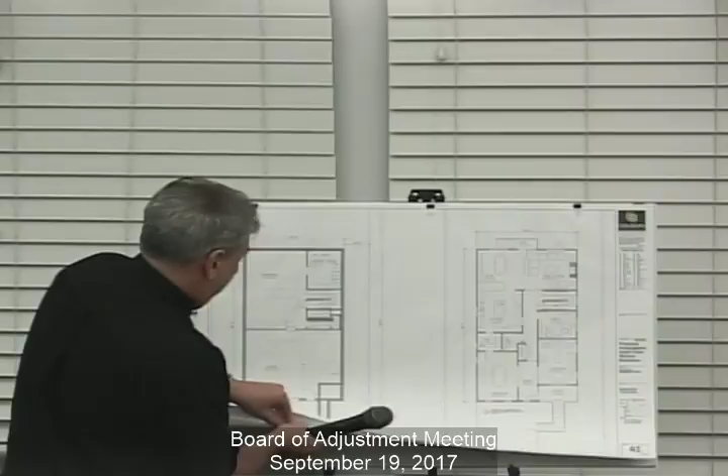Can you explain again why the man door for the garage is in the front of the house and not out on the side? Yes, so the way the grade of the property is set, we would have to cut into the side of the property to get into the side of the garage. There is a retaining wall planned on the side, because the neighboring property is higher as well, to maintain their access way and a safe distance, and provide our garage recessed. If we made a door to the side, we'd need a larger retaining wall and a larger paved area, also creating sort of a hole where someone could be hiding, which is something we don't want to create.

I know that as you get closer to the temple, the houses sit up a little bit higher, it comes up like this, and as you go further toward Route 22, it's coming down somewhat. How much of it is actually going into the ground? So the driveway itself, this is approximately the line of the grade. If you connected the line, you could see that about 4 feet or so are below.

So the driveway's gonna slope from the street down? No, no, it'll be flat, slightly up, about 6 inches, because we don't want to have water running into the garage. Exactly, that's why I was asking. So we're cutting into the grade about 4 feet below what's there currently, creating approximately a 4-foot retaining wall on one side that will start at 0 and climb to the back of the property, similarly to the property to our left as you're looking at it from the street, as there are several retaining walls on her property as well.

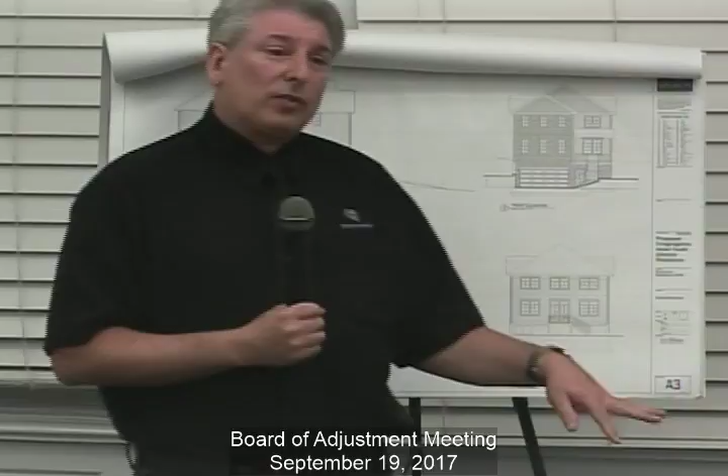I just have one other question. With the retaining walls and the driveway being set down, you're gonna have to put some guard rails or something so people don't fall down onto the driveway, correct? Well, we weren't planning a guard, only having a step. Since it's not considered a walking surface, it's lawn there, there's nothing that requires a guardrail. So if somebody falls off the 4-foot-high wall onto the driveway, I'm concerned about safety, you might want to consider putting something there to prevent children from falling. We'll have the block at the edge sticking above the ground, so someone would have to be trying to jump over it. But since there's no reason to be walking there, it's like any other retaining wall on a property.

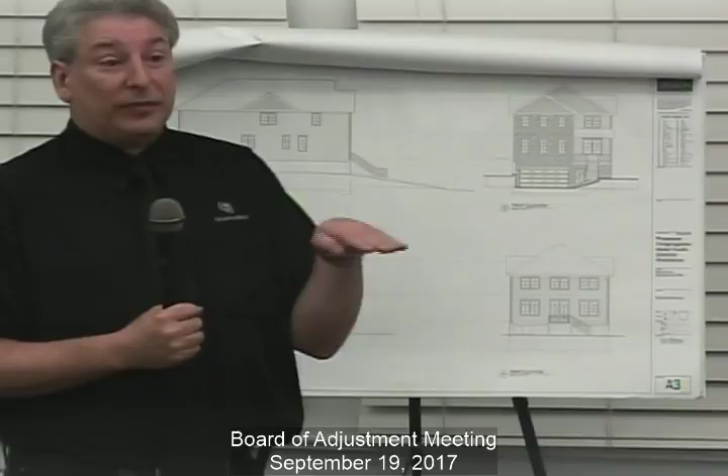If we do feel that is an issue, we could put up some sort of small guard on it. It's only 4 feet at the house point, and obviously it's pitching down to nothing toward the street.

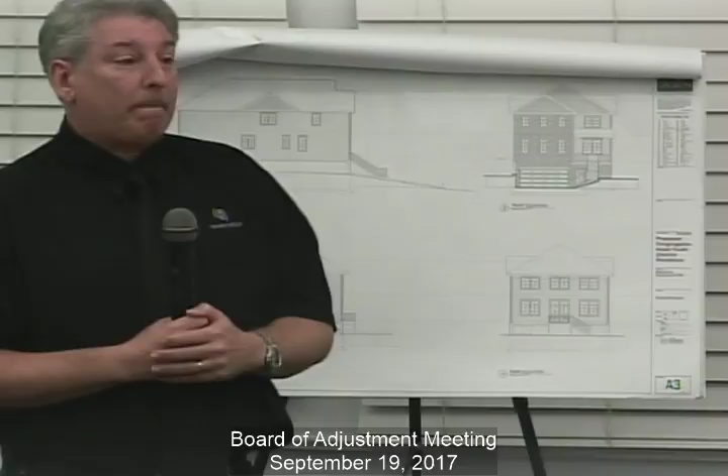Anybody else on the board have any questions? Do our professionals have any questions? Is anybody from the public who would like to ask any questions? Thank you.

At this point, I would call my final witness, Matthew Seckler of Stonefield Engineering. He's our planner.

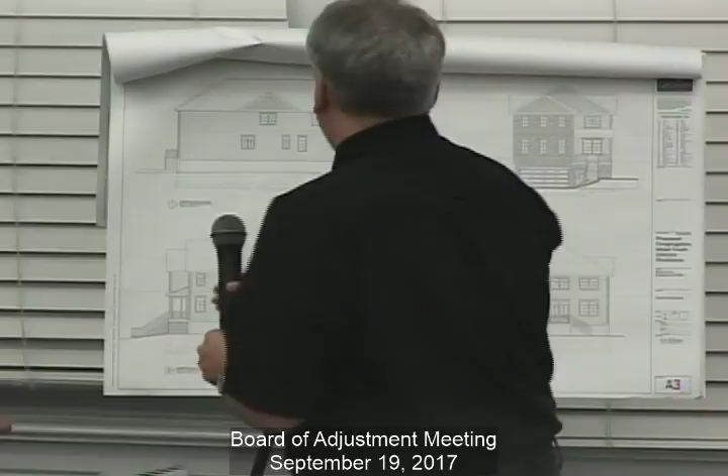You swear the testimony you're about to give and any evidence you present to the board is the truth, nothing but the truth, so help you God? I do. Please state your name for the record, spelling your last name, and give your work address. My name is Matthew Seckler, that's Seckler. I'm a senior project manager at Stonefield Engineering Design, address is 92 Park Avenue in Rutherford, New Jersey. Mr. Seckler, would you tell the board your credentials and that your license is current and in good standing? I have a Bachelor of Science in Civil Engineering from Union College, a Master's in City and Regional Planning from Rutgers University, licensed professional engineer and professional planner in the state of New Jersey. I've appeared before this board a handful of times previously. And your licenses are all current? Yes. Thank you, we'll accept you.

Okay, Mr. Seckler, is this a new exhibit? Yes, I believe it should be A3. Okay, so if you would be so kind as to take the board through the justifications for the two requested variances, building coverage and lot coverage, from the planner's perspective. Sure, I'm marking A3, titled Aerial Exhibit prepared by Stonefield Engineering Design. It was prepared September 19, 2017. It shows a Google Earth photo that was taken in April of 2016, so fairly current.

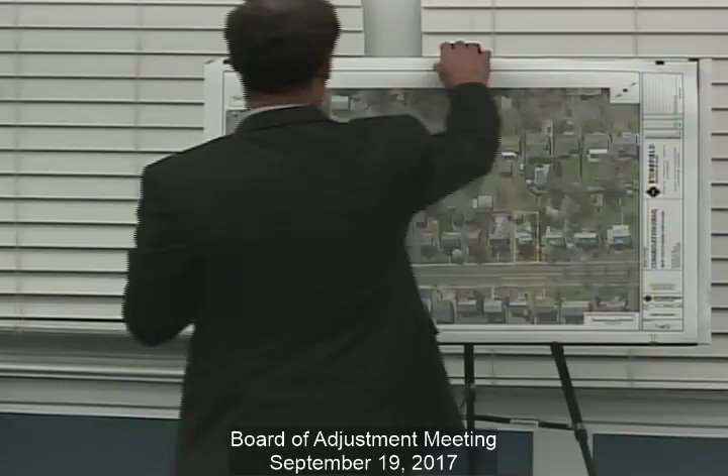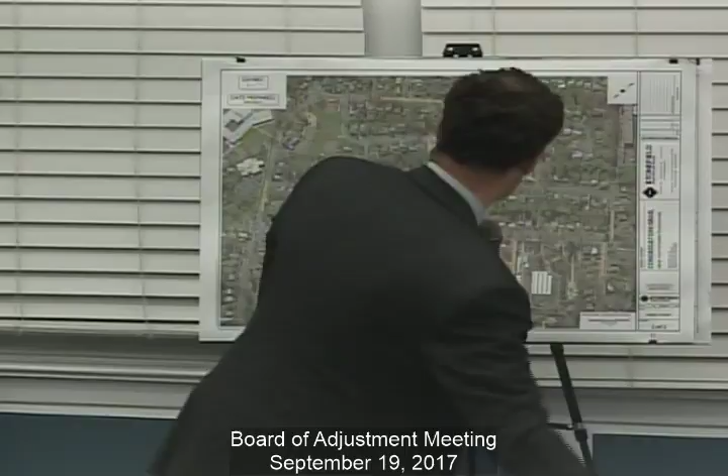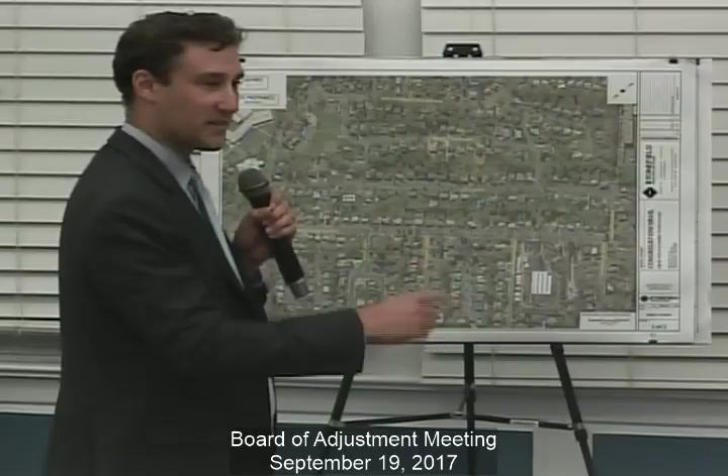What's important to note - I'm going to flip to another aerial exhibit, which I'll mark A4. This is a more zoomed out aerial exhibit prepared by Stonefield Engineering, dated September 19th, 2017. Again, the site is outlined in yellow. I've zoomed out to show the limits between Shunpike Road and Nelson Place. Every single lot to the right along Mountain Avenue, along the easterly side, is a conforming lot, at least 7,500 square feet or larger. This is important when looking at the size of the house, and I'll explain later how this house would be permitted in terms of building coverage on every single one of those lots to the south of our property. So I think it's in character with the neighborhood.

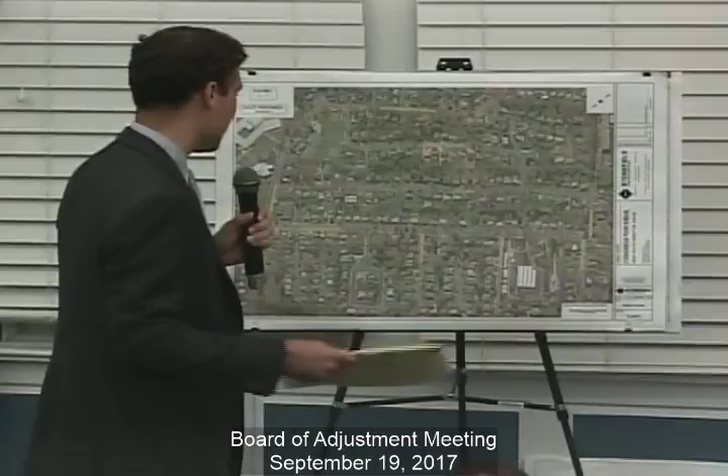In addition, the existing site, as mentioned by the temple president, has a house in disrepair. It's definitely been well used, and now it seems more worth it to tear down and rebuild rather than try to repair the insides and rehabilitate the house. As Clara mentioned earlier, in the survey - and this was on the site plan, so I'll pull it up on A1 - on the second page, which is the survey, there's that block garage that still exists in the back. Right now it's boarded up, and there's a frame shed in the rear.

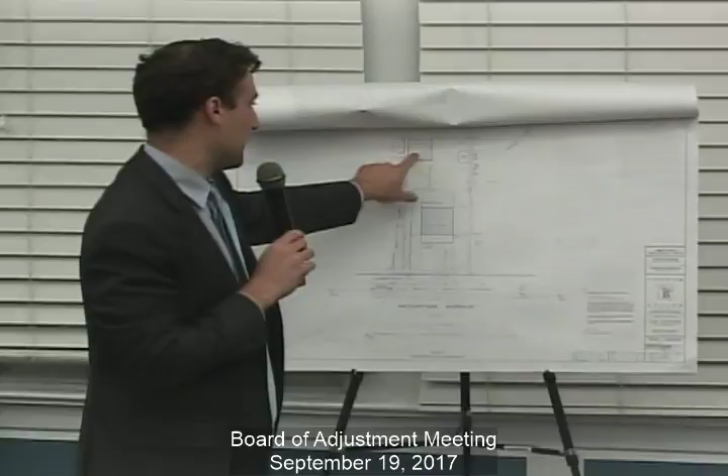Both of them are existing nonconformities related to your variances for accessory structures. You require 5 feet from the side and rear property lines. It's a little under 2.5 feet from the side yard. The garage is under 2 feet from the rear yard, and the frame shed is under 2 feet from the side yard on the neighbor on the southerly side. So all those variances exist on the property, as well as the lot variances related to the undersized lot, both in narrow width and insufficient lot size.

We are redeveloping this site, and you've heard about the single-family house we're putting on this site for the youth director. The architect spoke eloquently about the requirement when you have this growing community of young families. Having a youth director is a draw for the temple, and this house is the draw to keep a youth director. These youth directors tend to be young, growing families, and the existing smaller houses, even the house currently on this property, really don't have the space to keep a youth director as part of the community.

In addition, as mentioned by Clara as well as the temple president, the space within the synagogue is very limited. So in addition to being the single-family house for the youth director, the additional storage space - so the youth director could store his own products, whether sporting equipment, educational equipment, or arts and crafts equipment, at his house as opposed to at the temple - is definitely necessary.

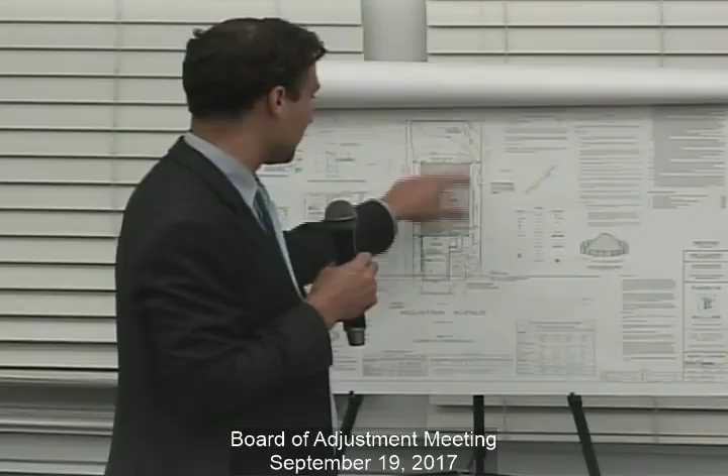Lot coverage - you heard extensive testimony by our engineer, and he mentioned how currently the existing house's roof leaders, when fully hooked up, basically just drained to the street. In this case, we are capturing the roof leaders and putting them into a dry well. So although we have a lot coverage variance that we are increasing, I believe the fact that we are properly managing all of the rainwater that hits the roof into the dry well is a significant improvement.

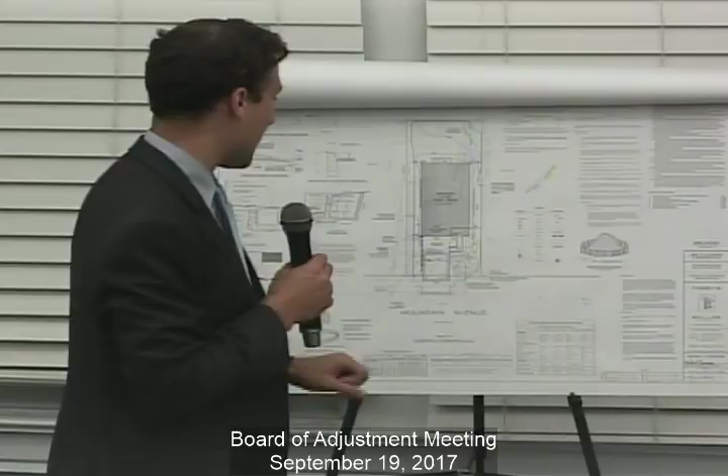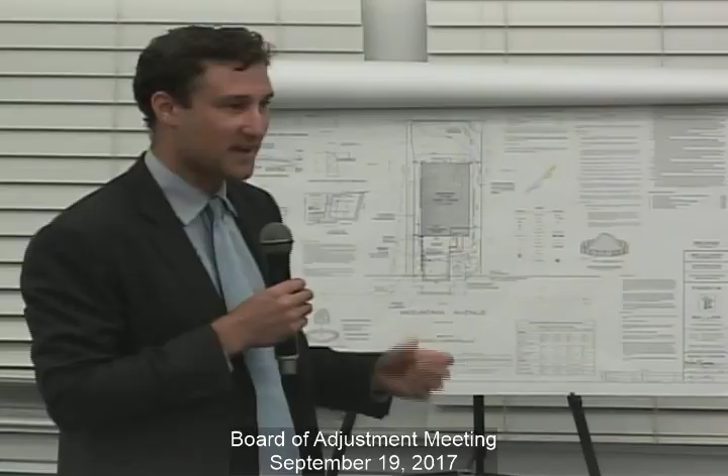In addition, we do have a hardship related to the access easement that we are required to provide. About 5 to 6% of our variance is related to the fact that we have to provide a paved driveway to our neighboring property. We don't have any benefit to this driveway once this proposed house is built. It doesn't provide any access to the rear of our house for our vehicle - it's really just intended for the neighboring property, tax lot 31. So again, that is somewhat of a hardship this property has: about 5 to 6% of our lot has to be paved, not for our applicant's benefit.

So looking at the justifications for this application, we're looking at a bulk variance, and there are both C1 and C2 criteria that can be met with granting this variance. The C1 is related to hardship, and as I mentioned, this lot is undersized - it's unique in that it is the last undersized lot along this stretch. So I do think there is some justification for a C1 variance. Although we're not required to also meet the C2 variance when a C1 variance is met, I think this flexible variance can be granted for this application.

Typically, we would balance the positive and negative criteria and conclude that the positives outweigh the negatives. In this case, I think this particular application is somewhat unique in that it serves an inherently beneficial use. Although we're not here for a use variance - it's a bulk variance we're seeking from the board - I think you could look at case law that investigated these kinds of accessory structures that help serve inherently beneficial uses, and the three-pronged approach to deciding whether they can be deemed an inherently beneficial use, which would automatically grant the positive criteria, since inherently beneficial uses automatically advance zoning and automatically meet that positive criteria.

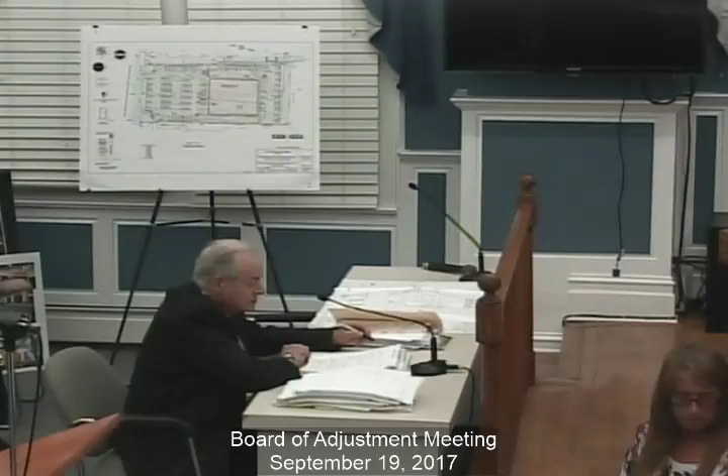Mr. Chairman, members of the board, my name is Erwin Schnitzer. I'm an attorney representing RPG, the owner of the property at 75 Route 22 East, Springfield, New Jersey, Block 3801, Lot 6. That property previously housed the Colonial Motel, which is in the course of being demolished. The proposed development would consist of a new state-of-the-art building of approximately 39,204 square feet, 19,602 square feet per floor, a 2-floor building that will house 24-Hour Fitness, which is now located on the adjacent property near this site. The variances needed are for parking, lot coverage, height, and sign variances.

Our expert witnesses will get into the variances needed and the relief requested. I have 4 witnesses: Leland Titus, a civil engineer; Blaze Weimer, our architect; Gary Dean, a traffic engineer; and Dan Block, a planner. Before we get into their testimony...

I understand there are objectors here who state that the notices I have provided are defective, and I would like them to go on the record and tell me why they think the notice I served on the property owners and published in the newspaper is defective.

Mr. Chairman, my name is Stephen Bulkowski, an attorney representing HEC Holding Companies LLC. We are the adjoining property owner, and we've discussed with the board attorney before going on the record that part of the application tonight also incorporates access from Lot 9, and the 200-foot notice didn't extend to that Lot 9 property as required by the New Jersey Supreme Court in Nuckel versus Borough of Little Ferry. I gave a copy of the case to the board's attorney, and it's our position that without proper notice to the public within 200 feet of that adjoining lot, this board can't proceed, because all of the necessary people who should have received notice have not received notice.

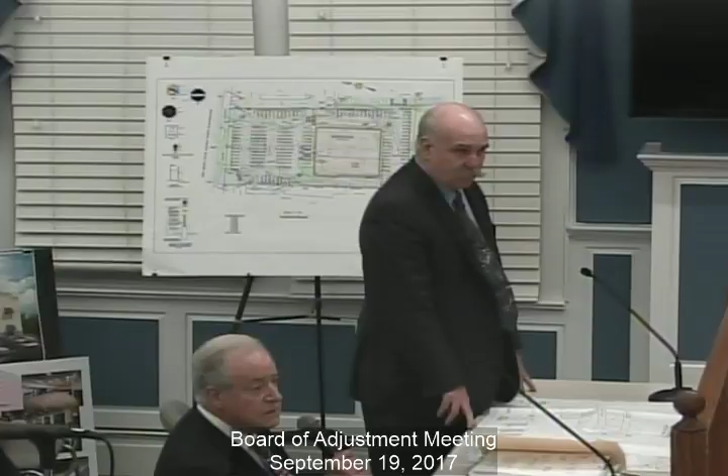And you've testified before this board on previous occasions? Yes, I have. I would ask the board to accept Mr. Titus's qualifications as an expert witness in the field of civil engineering. Is your license in good standing? Yes, it is. We can accept your qualifications. Thank you. Are you familiar with this application, Mr. Titus? Yes, I am. Would you describe the proposal?

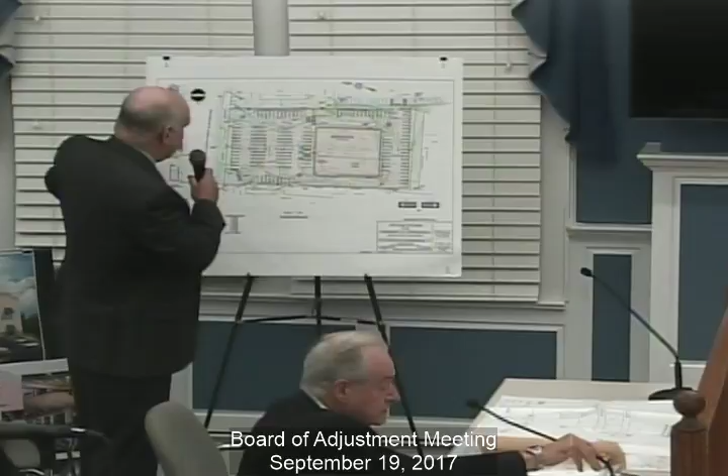The site is situated on Route 22, on the eastbound lane, south of Route 22. Sir, we will mark that as A1. A1, this is sheet 4 of 12, colorized a little bit to show what's going on.

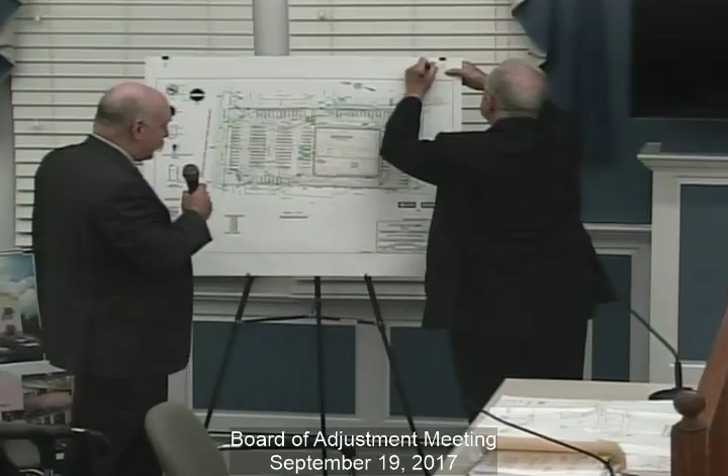Is that the site plan? That is the striping plan. Okay.

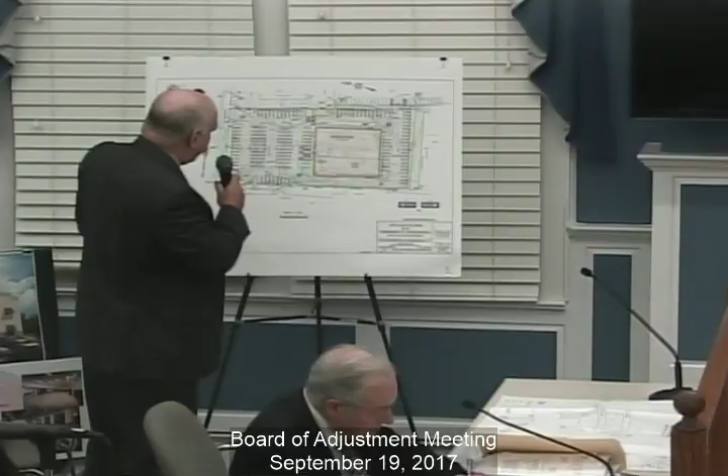Anyway, the site is south of Route 22 eastbound. It generally slopes in a southerly direction towards the rear, away from Route 22. The proposal is to construct a large field of parking out front, the building closer to the rear, then there's additional parking in the back.

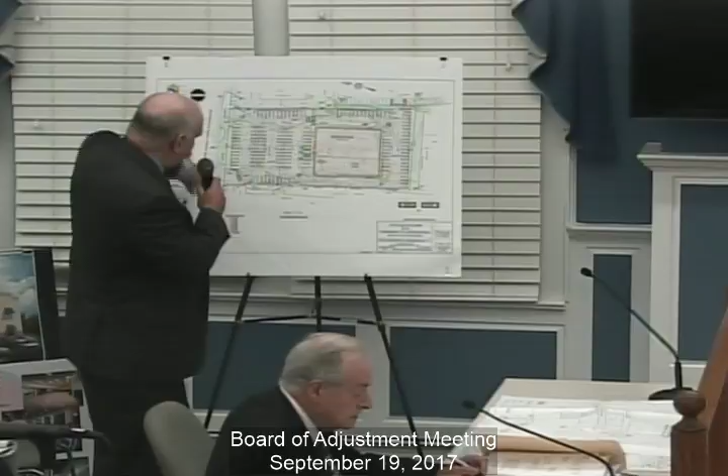We're going to use the present ingress and egress off of Route 22. Presently, you can ingress the site on the westerly side of the property, and you exit the site on the easterly side of the property. The circulation would generally be through the parking lot. You could drive completely around the building, and you can also drive out to the east onto the adjacent Lot 9, which is other property owned by Mr. Gagliotti.

Are you familiar with the zoning for this site? Yes, I am. And what is it? It's in the HC zone.

And are there any variances required for this proposed development? Yes, there are. There's a variance required for lot coverage. I'm showing 70%, but I'm seeing in the memos from the consultants that the requirement's 66% or somewhere less than that.

I can answer that. Mr. Chairman, some few months ago, the town amended the ordinance to reduce all of the coverages in all the zones by 10%. So it was reduced then from 70% to 63% in this zone. So that is the current coverage. He may have had an older version that didn't pick up the latest amendment to the ordinance.

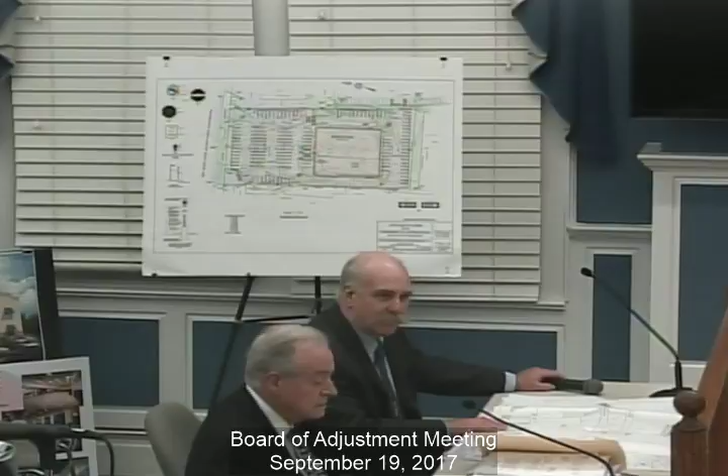Okay, so it's 63%. So anyway, the existing is 70.3%, and the proposed is 88.3%, so there's a variance required for that.

Also, there's a variance for building height. The maximum height allowed is 40 feet, we're proposing 54 feet. Did that change at all? The height requirement changed at all? No, that's the same. Okay, just the lot coverage. Just the coverage, that's correct.

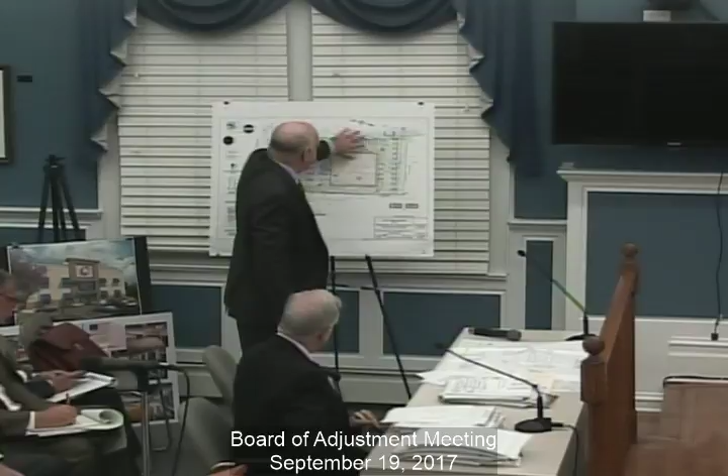There's two numbers floating around on the parking. The plan shows 123 spaces, and in the planner's memo it mentions 135 spaces, and the 135 number is correct, so there's more than 123 that's shown on the plan. What happened is these spaces on the easterly side adjacent to the building were not included in the count. So it's 135, not 123, okay. Yes.

Sign. What's that? I guess there are some sign variances, but the architect is better to speak on that. Okay. There is a proposed pylon sign that I'm showing adjacent to Route 22, and it would be just east of West Village Drive.

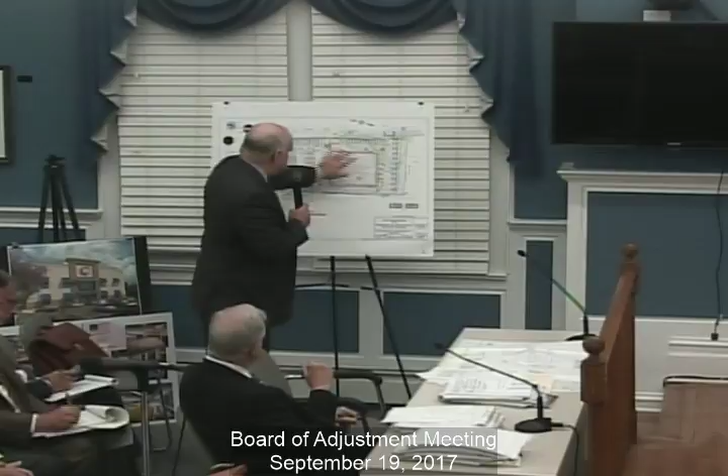Could you explain the drainage for the site? Again, the site generally wants to drain in a southerly direction. The existing conditions, it drains in that southerly direction, and then it flows across the back in an easterly direction towards Lot 9. That's going to be maintained, the general drainage pattern. And I'm showing a whole series of 15-inch pipes and catch basins that kind of enhance the flow to the back. But that's not what's going to happen.

The DEP now allows you to do what they call pervious pavement. It's pavement that the water is allowed to absorb through the pavement and into the soil. What this does is drain the whole property right through the parking lot, and nothing will ever get to the catch basins as far as the parking lots. And this treats the water quality. What they have to do after they put this pervious pavement in is vacuum the parking lot periodically to pick up the material that is filtered out. The parking lot acts as the filter.

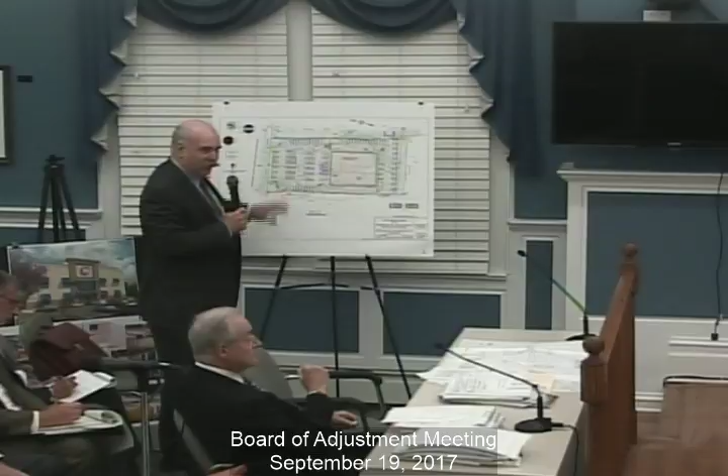So most of this drainage is here just for emergencies. Also, the roof to the building - we're not going to let the water flow through the roof into the building, so that would drain and run off into this, but there would be a net decrease in the coverage because we're going to absorb it all right into the soil. This is a recent change in DEP best management practices. Could you explain the lighting for this site?

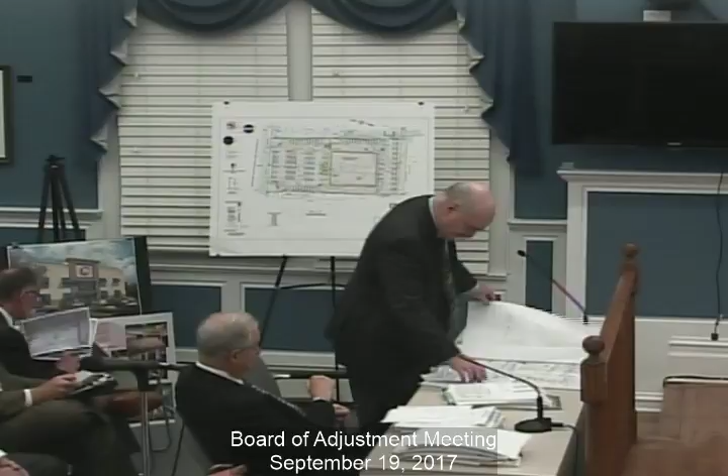The lighting and landscaping is shown on sheet 5 of the plans. It shows 9 poles throughout the site. They're all going to be LEDs. They're at 18-foot high, which would be the height of the fixtures.

There is four singles, just one head on a pole, and then there would be 2 triples and 1 double, and 2 quadruples, and they're around the perimeter of the building.

There'd be about 2-foot candles around the fixtures, and it would taper down to about a half foot candle. It's a pretty bright pattern that's put on here, but on a site that's called 24-hour fitness, I think it's best to have that site bright for safety.

The planner is asking about shielding on the backside of some of these fixtures, because we do allow it to overflow onto the adjacent site, particularly to Lot 9 and Lot 7. But that has additional parking that this site could utilize, and I'd like that to be brighter over there to blend into the site, so there wouldn't be any interference.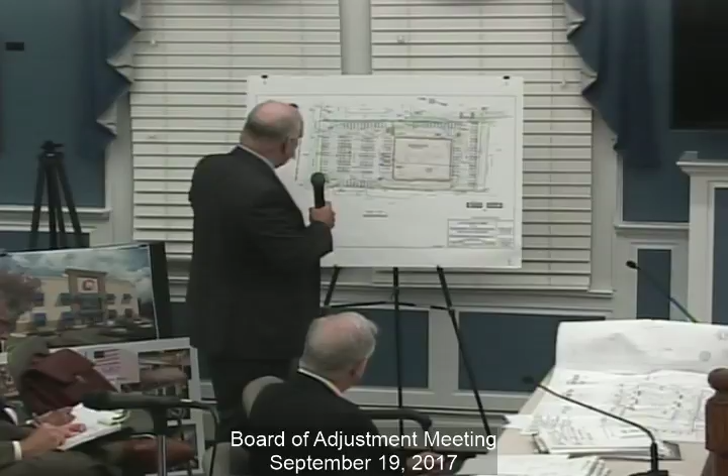Would you explain the parking and circulation of vehicles for the site? Again, there's a large parking bay out front towards Route 22. Everything circulates, all the flow is two-way. You can go around the back of the building, you can go on both sides, and then you can also cross into Lot 9, which is the subject of the question that was proposed before the meeting started.

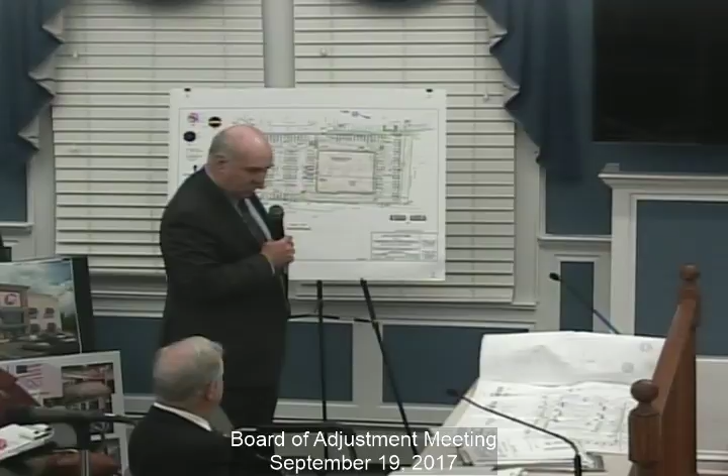And what size vehicles could circulate in that area? This is set up for passenger vehicles, and it's more than adequate for passenger vehicles. There would be no large trucks in here. There might be a few deliveries once in a while that would come in regular UPS trucks, but that's about it. There's no large vehicles in here, no tractor trailers, no dump trucks.

And the UPS vehicles would be able to manage the site? Yes, without a problem. And you had already described the impervious coverage for the site? Yes, I have. And how many signs do you show on your plans for the site? I have the one entrance sign, and then most of them are just directional signs, like one-way signs, do not enter signs, stop signs, things of that nature.

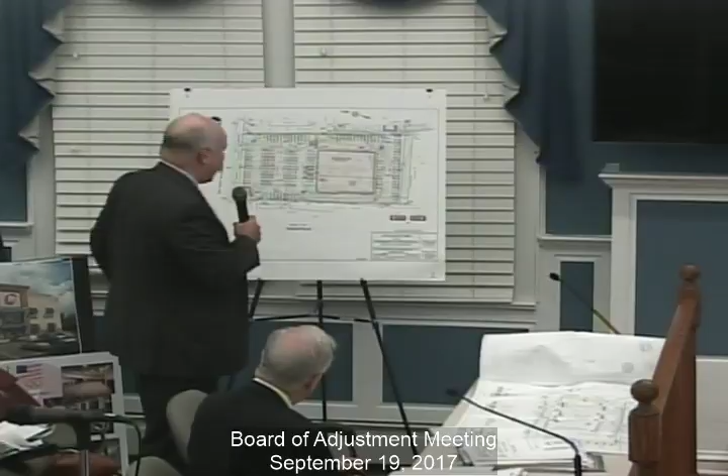Are there any additional items that you think relevant in your presentation? No, I have no further questions of this witness. Thank you. Anybody on the board have any questions for the witness?

I have a question. With the impervious pavement, you were talking about some pervious pavements, all right? And I get confused with that myself. You talked about some kind of maintenance that's required. Are there standards, and is there something that's going to be required? You have to prepare a maintenance manual, and typically that's filed in the county record.

Yeah, an operation and maintenance manual, it was in my letter, but needs to be provided, detailing the... it's listed in the state regulations what that maintenance manual needs to include, things like type of cleaning, schedule of cleaning, record keeping, and the like, so that's a requirement.

Elias, is there anything in your report of September 13, 2017 that you'd like to address with Mr. Tiger? This is Art Elias's letter. He was not able to make it today, my name is Andrew Cangiano, but I'm filling in for Art. On the letter, the points that the engineer and I had spoken, he agreed that he would comply with the request, particularly for stormwater, to revise the plan to address my comments on stormwater. And I agree with the engineer.

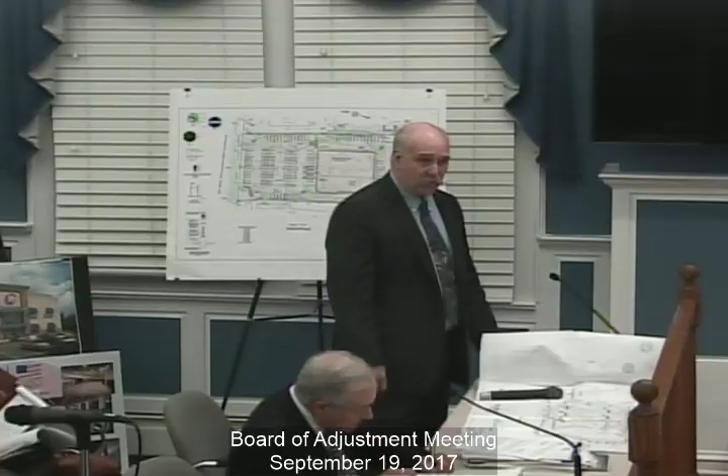What is done on the lights in the parking lot to make it safe for traffic driving on Route 22? I wasn't proposing a backside shield, and there is some overflow from the front fixture on Route 22, but I can put a backside shield on that one. I have no problem doing that, and it would make it safer on Route 22. Perhaps that's a good thing to do. We can propose that.

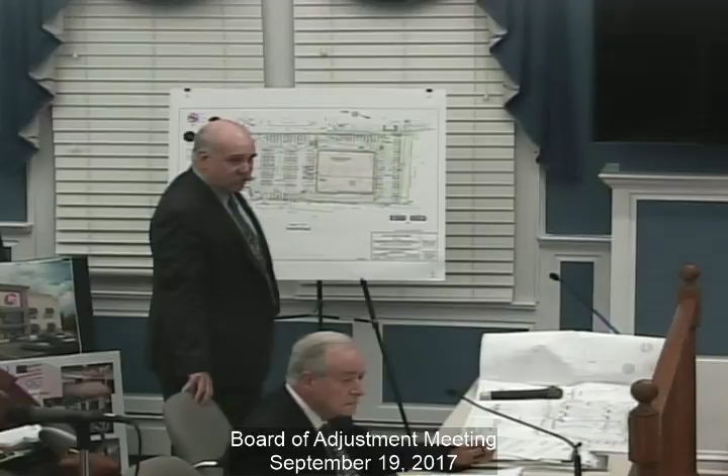Is there enough room in the entrance and exit to get emergency vehicles if needed? Yes, fire engines and such, it's the same entrance configuration and exit configuration that's there now, and it's very wide. The planner's memo recommends shrinking those down to provide more parking spaces, but we're not going to do that. We're going to leave it the way it is because the traffic expert will explain that later. It has to do with permitting for the DOT, it's easier to get a permit if we leave the entrances as they are. I'll follow up on that question for emergency vehicle and fire truck access.

Have you run turning templates for the circulation through the parking lot, around the backside and perimeter of the building, if it needs to access the rear? I have not. Will you provide that? I can provide that.

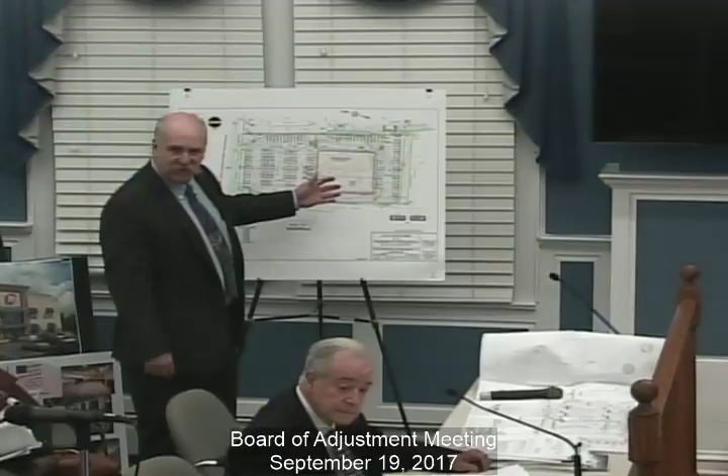Any other questions? You answered my question about the driveway width, or the traffic engineer will answer that question. I did mention about lighting that there was a spot on the west side of the building, along that driveway, where there wasn't lighting coverage. There's only an emergency exit there. I don't really see the need for it, but we could put some lights mounted on the building directed down in that area.

My concern is that the main entrance to the building is the facade facing Route 22, and there's parking all around the building. If someone parked at the rear and walked to the front, I take it that would be the route they'd walk. I don't think so, I think they'd go the other way to the front because there's a sidewalk there. There is a small sidewalk, but it's just to smooth out the curb line. So you don't anticipate anyone walking on that side of the building? No, I think the employees will be parking in the back, and there are entrances back there for employees, but patrons will have to come in from the front.

All right, well, it's a consideration. I think maybe building-mounted lighting may address that issue. Okay, thank you. Well, since this is a 24-hour facility and you want to make it safe, perhaps there should be some lighting there, just in case. Okay.

Any more questions from the board, our professionals? Well, obviously there's the issue of the parking. I don't know who's going to be providing testimony on the parking, I think that's going to be the traffic guy, correct? All right, we'll get him, don't worry.

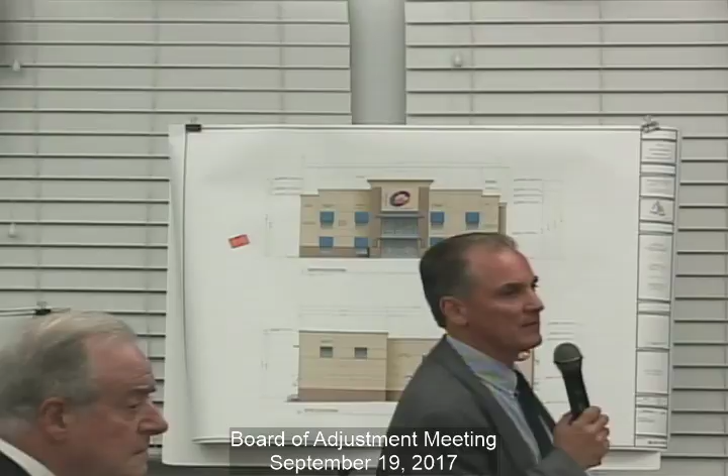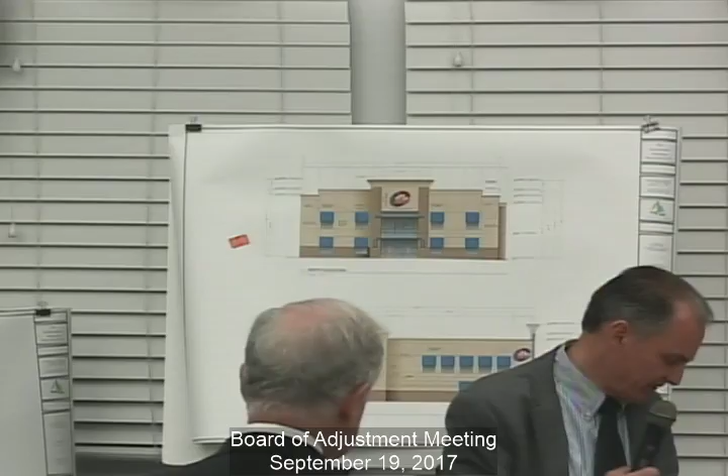How tall is the actual building itself to the roof, forget the facade? The highest point is 58 feet 4 inches above the floor or grade. If you have equipment on top of the roof, and the roof is 58 feet high, and the equipment could be as much as 7 or 8 feet, now we're well above 60 feet. So as a layperson, how tall is the actual building? 45 feet without a facade - the highest roof level is set at 44 feet 4 inches.

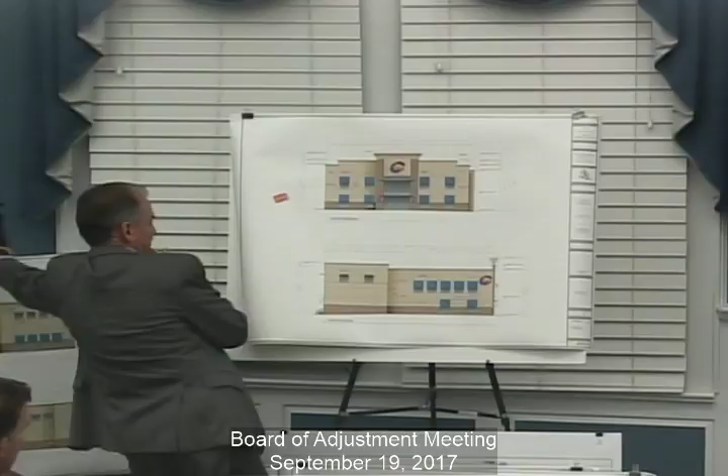So you have 10 feet of facade, these tall walls surrounding the building. That's just the front, that's not the actual - no, it steps down considerably on the side. How much does it step down? The east elevation steps down to 46 feet 6, and steps up higher to 51 feet at the rear. But it's still an indentation where the equipment is, so that's just the facade, not the actual building. Correct, the actual building is at a lower height.

Can you explain how you got to 54 feet for the building height relative to the 58.4? I'm confused, because on the chart it says 54 feet, but on the elevation it says 58.4. The 54 feet is actually coming off an older variation of the building. So the height would be 58.4? Yes, if measured to the parapet. We measure height by ordinance to the average roof level at 40 feet.

That's what I was asking - so our parapet, our roofs are actually relatively close in height. Our roof over the gym, which is our taller roof, is a little more than 4 feet above the allowable height. It's the parapet walls, which typically by ordinance are only about 4 feet tall. So just to be clear, the building height is measured to the roof, not to the highest point, to the lowest point? Correct. So those cornices could be really 20 feet high - that's not what we consider building height relative to our ordinance. Our ordinance is measured to the roof line. But by ordinance, it allows a 4-foot parapet wall, so what we have are taller parapet walls than are allowed by ordinance.

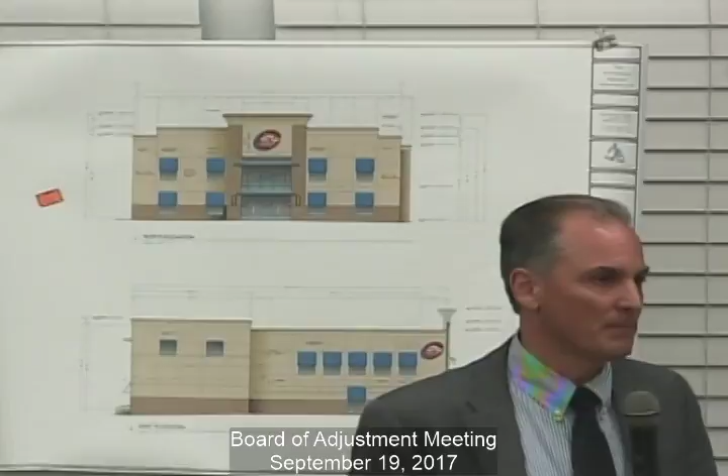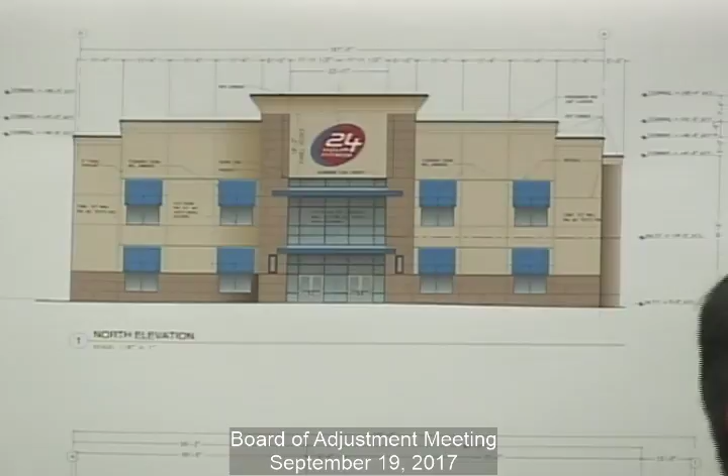It's serving multiple tenants, and the sign area is about 12 feet wide by 18 feet in height. So it's not unusual for what we have on the highway. The nature of their logo is almost the same width as it is height, so it gives a square proportion. If I were to proportion that back to almost a quarter of the size, because I lose height and width, it's relatively small. What about if you took the sign in the shape it is now and put that on the pylon, getting rid of all the extra around the square?

How much, if you left the logo the same, not the box, just the logo, would you be better off overall? Perhaps, we can look at that. I think that should be something we could take a look at. I would have no objection to looking at that. Okay.

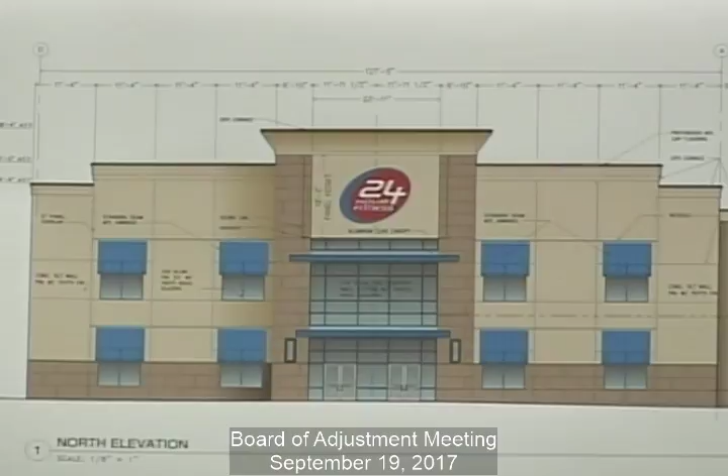Anybody else have anything right now from the board? Our professionals?

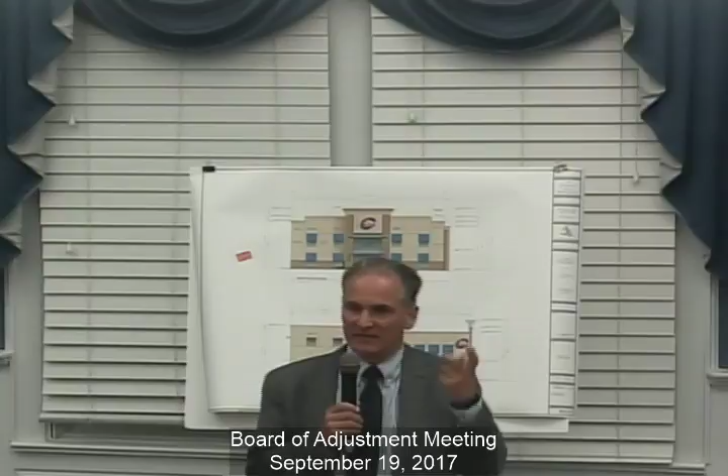Again, about the height, our ordinance measures the height from the average ground elevation at the corners to the surface of the roof. What did you say that dimension was? We gain 1 foot 2 inches below the floor level, because we drop off in the back when we take the 4 corners into account. Right, but what is that dimension? What is that height?

Okay, for the sake of argument, our roof height at the basketball court is now 44 feet 4 inches above the floor. That would become 45 feet 6 inches above average grade.

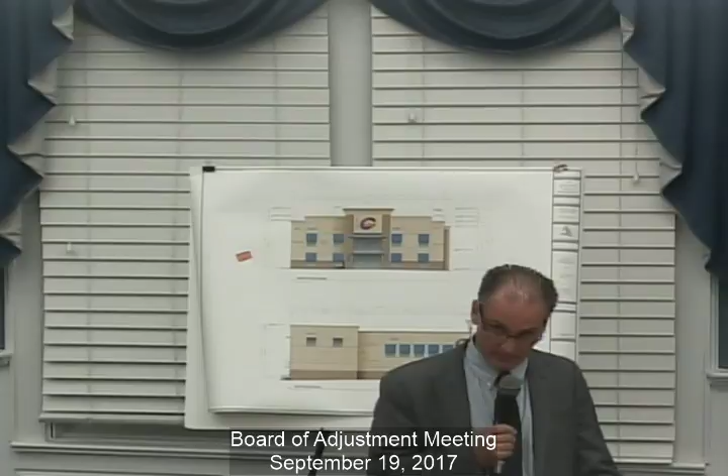The reason I ask is we've assumed, without that information, that the variance you were seeking was for a 54-foot roof height. But actually what you're seeking is a 45.6-foot roof height. Correct. Plus you're seeking a variance for the height of the parapet wall in excess of the 4 feet that's permitted. Correct. Okay, that should be clarified.

In relation to the wall-mounted signs, 2 of them are on the sides of the building. How is it that, or doesn't that duplicate the function of the freestanding sign? Because the freestanding sign proposed is going to be perpendicular to Route 22, so motorists going eastbound would most readily see that freestanding sign. But with the building set so far back, how visible will those side signs be, since the building is set back and traffic is on the other side of the highway, not coming from the east side? So could you explain why those 2 signs on the sides of the building are needed when the function seems to be duplicated by the freestanding sign?

I always find them to be very effective corner signs, because you don't really see just the front of the building. You travel down Route 22 at 60 miles an hour, the front of the building goes by in a blur. You take note of where a building is basically from the opposite side of the highway. You'll see the sign on the corner on the east as you drive west, and vice versa in the other direction. No matter where that building's located, there's no way you're going to see it otherwise. You said 210 feet back, that's like a football field, that's quite a distance.